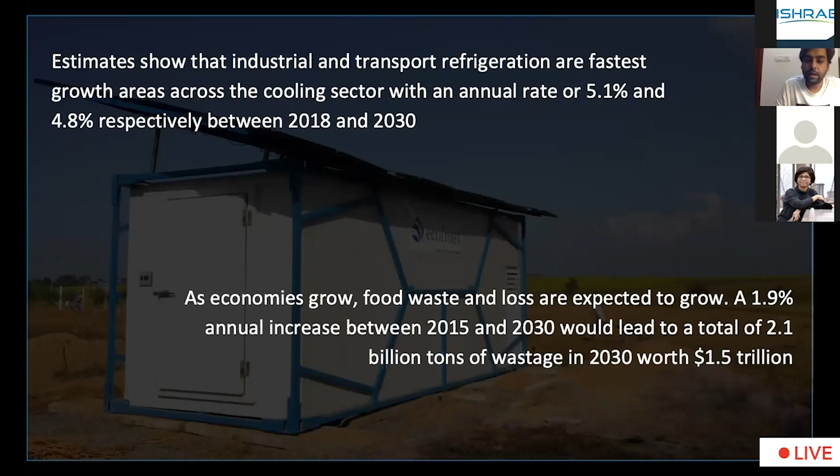If you can see some figures, food consumption has also increased, and as population increases, food consumption increases. Wastages happen because correct refrigeration systems are not present everywhere, resulting in billions of tons of wastage, expected to grow at a significant rate as you can see on the slide.

In general, we know that rampant usage of conventional energy sources leads to climate change, and that's a vicious cycle. As the climate changes, as the average temperature of the Earth increases, that leads to more consumption of refrigeration energy, meaning you spend more energy, throwing away and rejecting more heat which gets trapped.

You're actually using more fossil fuels and more refrigerant, which are not good for the environment and are being thrown into the environment, making it hotter. It keeps adding up, and as our requirements change with time, it becomes a bigger problem requiring a faster solution.

Space cooling will grow threefold between 2016 and 2050, which isn't very far away. If you look at the energy that an air conditioning ecosystem uses, it was 300 terawatt hours in 2000, which will become more than 10x by 2050 - an alarming situation that calls for changes in how we utilize energy to tackle this problem.

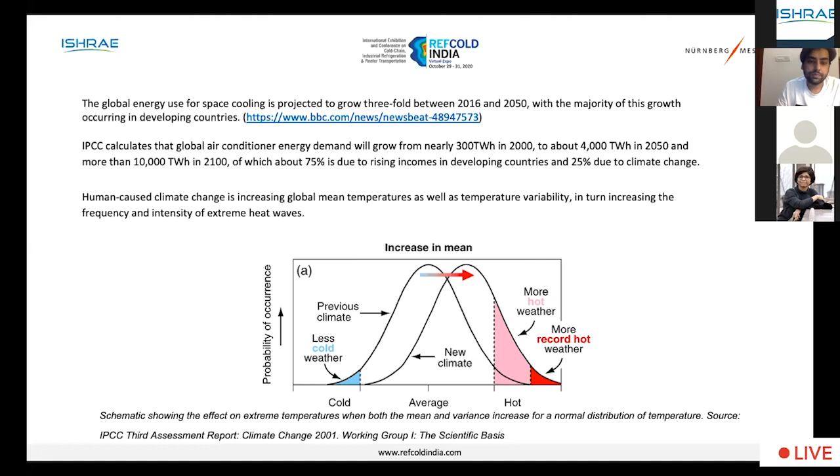With this, global emissions of carbon dioxide also increase. These cold storage technologies, used for storing fruits, vegetables, flowers, ice creams, meat, poultry and other commodities, require cold storages, pack houses, reefer vehicles, and ripening chambers. If you look at the Indian context, this is set to change very significantly in the next 7 to 8 years.

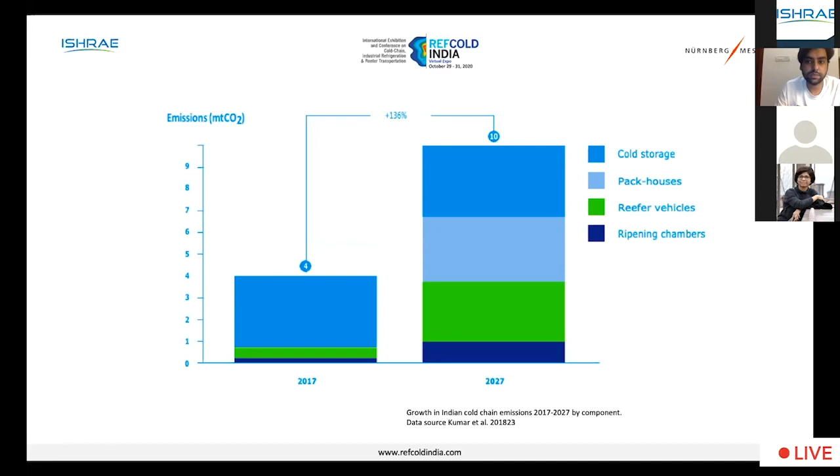You can see the graph - overall carbon dioxide emissions are set to grow by 2.5 times in the next 7 to 8 years, which is a problem to be solved. I think we are at a situation where we have ideas on how to solve them; it just requires better reach and better understanding of how these technologies work, and I think we can definitely get there.

Talking about renewable energy, most of us know there are several sources that nature provides which can be utilized directly to generate electricity. Some are already utilized, like hydraulic power plants being very popular as an energy source, which if utilized sustainably turns out to be a great resource. However, it possesses its own problems.

Solar as a power source has come up very fast in commercial settings, where you can see solar panels pretty much everywhere now. Every city you visit, you might see a solar power plant in the outskirts, sometimes at airports, or solar panels installed on building rooftops, and solar thermal systems used for water heating purposes.

Wind energy has also been commercialized with time, although with limited success compared to solar, but it's not too far away. Ocean is a great source of energy - we have tried to tap into tidal power and wave energy from the ocean to harness energy. Biomass is also a great source of energy, and again, it has to be utilized sustainably.

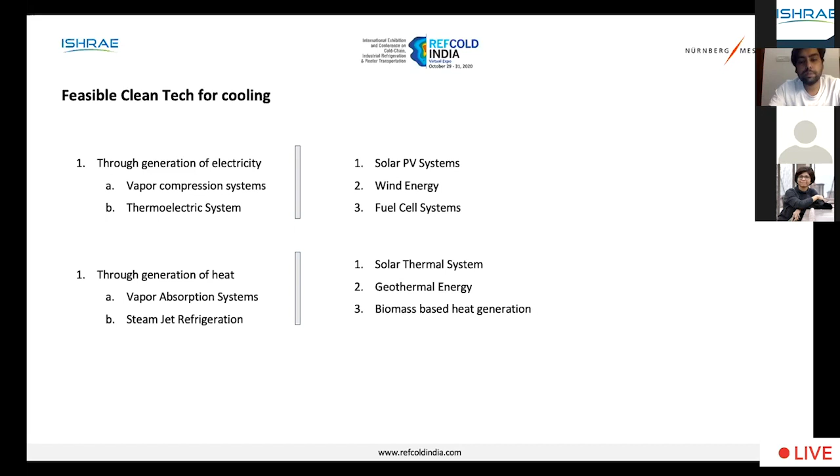Biomass-based heat generation is also a power source which is getting quite popular. We have seen some companies even in India which are making cold storages by utilizing biomass as a power source.

So if I have to talk about how to approach this entire design problem in terms of utilizing a renewable energy power source to produce cooling, availability is one of the main constraints of whether a renewable energy power source can be utilized at a particular place or not. Solar PV, for example, won't really work in areas where it's always cloudy, since we are not utilizing the heat of the sun, but the sunlight from the sun to produce electricity.

We need to ensure that we are at a place where there is ample sunlight, and India in general is a great place for producing solar. The Tropic of Cancer passes through us, and the majority of India is a good place to generate solar energy. However, there are cases in some parts of the Northeast and where hills are present in the north where solar is not utilized very well. But majority of places in India, including higher altitude places like Ladakh, get a great amount of sunlight to utilize as a power source to produce electricity.

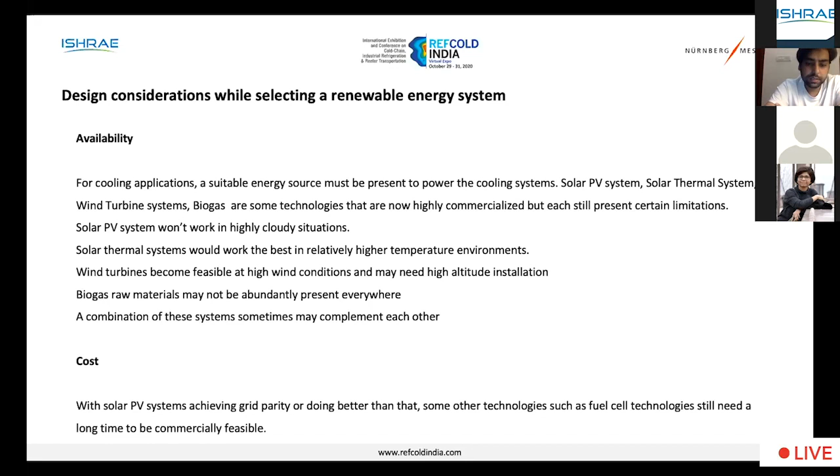But cost is one of the considerations we need to factor in when choosing a technology. Now, given that in general renewable energy power sources are complex and hence a little costlier than conventional power sources, energy efficiency becomes one of the biggest questions or problems to tackle while designing such systems. The reason for that is every unit of electricity extra that you utilize will cost you in the capital expenditure we are making in putting the renewable energy systems together.

For example, there are cases where a lot of cold rooms, which are small scale cold rooms, will be fitted with 60 mm of PUF, an insulation material, polyurethane foam.

If you are talking about renewable energy based systems, you'll try to optimize the amount of insulation that you use, which will in parts dictate the amount of solar panels that you utilize. There has to be a kind of trade-off between the two when selecting the number of solar panels and the amount of insulation that we use. The cost and feasibility trade-offs have to be evaluated during this period.

Refrigerants directly affect the efficiencies of the systems as well. If you look at some refrigerants, some of the ones which have been phased out actually have much greater efficiency compared to some of the more modern refrigerants that have come up. However, there are cases where, for example, R22 is highly efficient in a vapor compression system, but it's pretty much being phased out as we speak, in most of the world and slowly in India as well. The right refrigerant for the kind of temperatures you are working with is very important with respect to energy efficiency.

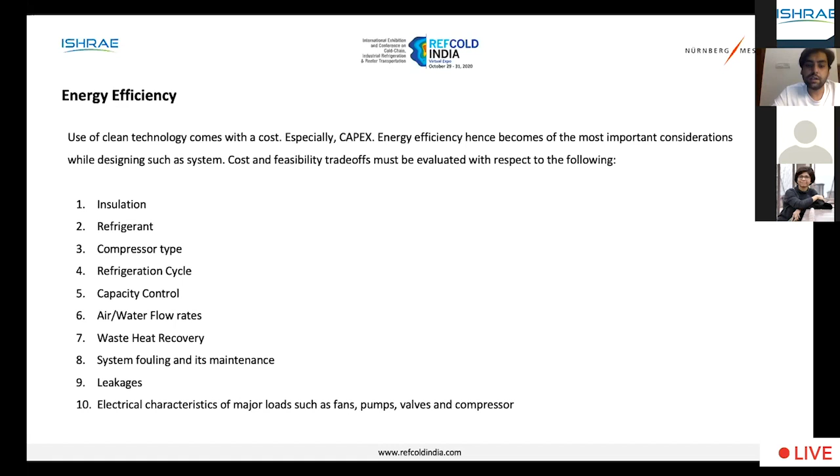Now, there are two major cases I'll talk about, one of them being a solar PV based system, where solar power is used as a kind of power generation system in a captive mode - meaning there is a cold storage establishment already available or being built or planned. It could be a 1,000 metric ton cold room or a 5,000 metric ton cold room, with a large surface area on the rooftop or nearby areas where solar panels can be put. And the way they work depends very much on local scenarios.

There is one case where solar PV - sunlight falls on the solar panels and generates electricity - that electricity can be fed directly to the grid of the entire cold storage system, and that energy is utilized right then and there.

If there is excess power available at any point of time which you are not able to utilize at some point of time in the day, that electricity can be exported back to the grid, and the government pays you back because you are now supplying electricity to the rest of the country. And in cases where there is a deficit in the amount of power that you are generating, you are pulling energy from the grid and you are paying for that.

Essentially what you end up doing is reducing the amount of electricity bills that you pay, and being able to generate the amount of electricity that you can with a given amount of solar panels, or the given amount of rooftop surface area, or the real estate area where you put solar panels. So that can be utilized.

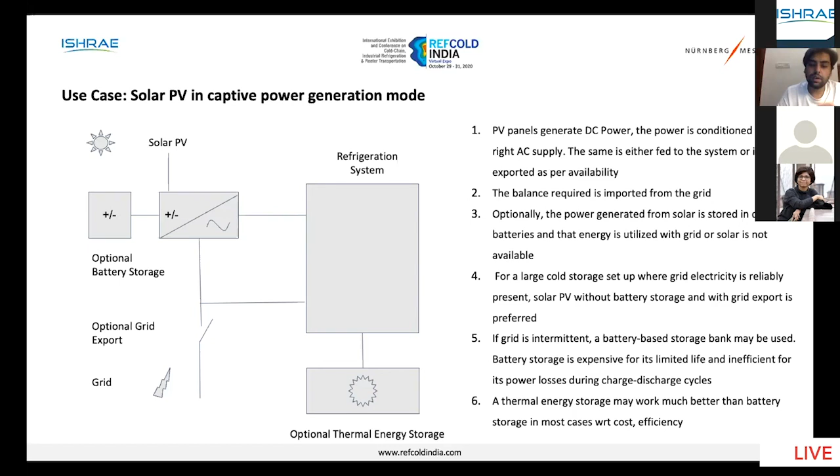That helps in two ways. One is, of course, you are able to use that as a buffer, as a replacement of battery. And second, there are cases where something called a differential tariff is applicable, where even though you have solar, you are still using electricity, but there are times of the day where the electricity costs are higher. At that point of time, you will run the refrigeration system with your thermal energy storage backup. In the rest of the times, you will utilize the grid electricity to charge the entire thermal energy storage. And solar PV can be used as an add-on to the system to make sure that you are reducing the amount of electricity that you are consuming even further.

There is another use case, and this is something that I have worked upon, and we have made products that are out there being used by people, where you have solar panels, you generate electricity, and convert it such that it can run a compression system, a vapor compression engine. At the same time, while you are pumping that energy into a compression system, there will be times of the day where there will be an excess generation of power. So the system will be designed such that it is able to give a bare minimum amount of cooling for the room cooling to happen.

But at the same time, given that this is a standalone system where there is no other power source present unless it's absolutely required, in those cases we would need to have a thermal storage or a backup system present over there. What I have done with our Ecozen products is basically a phase change material-based system.

However, there are a lot of cases where people put this excess energy inside batteries. Those batteries then convert the chemical energy stored in them to electricity, and that will keep the entire system cold 24/7, even when solar is not present. Given that solar is present only for 10 to 11 hours in a day, we need some kind of backup system, and there could be two different methods. One is a PCM based thermal storage, and second could be a battery based system.

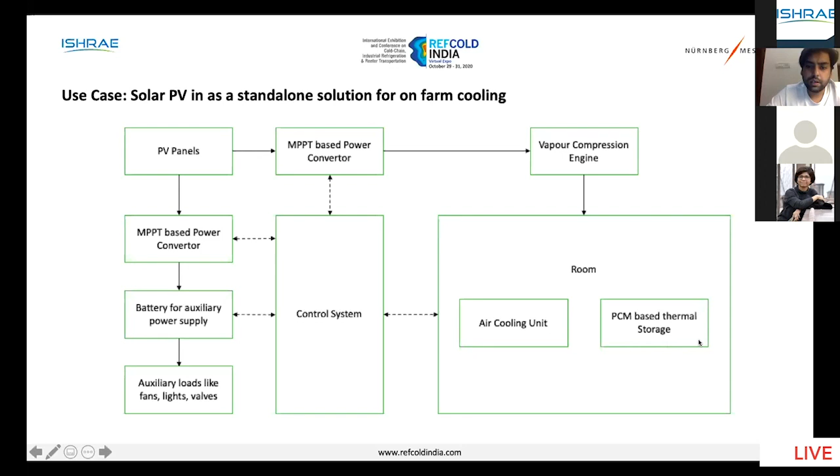And the reason why a PCM based thermal storage can be utilized over here is that it's ultimately cooling that you want to do. So why not cool earlier than you really need to cool the system, and utilize that cooling energy that you have stored at a later point of time to keep the entire system cold. But at the same time, since fans and control systems and auxiliary things like lights, etc., will require some kind of electricity, there is a small amount of backup battery energy that can also be stored over there.

So this is something that I was explaining: if we are sizing the system, we size it such that this is the amount of energy that we have, this is the heat load that we have, and this excess amount of energy goes into something called a thermal storage system, or something like a battery management system, where it is stored either in form of chemical energy or in form of thermal energy, and this energy should be sufficient to give you a stipulated amount of backup.

And typically, when we think about solar systems in general, we at least make sure that when the day ends, I should be able to keep the entire system cool until the next sunrise. However, we should also explore the possibility of the next entire day, and that is a worst case scenario, that the entire next day there will be zero production of solar. If that happens, size the amount of solar panels such that this can really be handled.

Sorry, my mouse is not really, just a moment. Okay. Okay, all right. So move to the next slide.

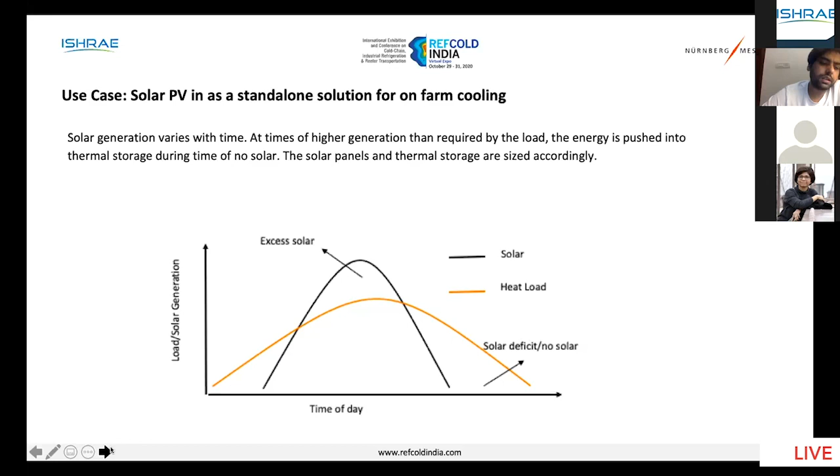But in case of solar PV systems, another thing that I wanted to touch upon was having solar panels at the correct angles. So if you talk to any professional who has been in the solar space, who installs solar panels for, say, pumping applications or rooftop solar generation systems for home applications, there are some general thumb rules that exist. Even in the power plants, there will be some thumb rules.

One is that there are technologies that can be utilized which track the sun at all points of time, right? Be it any season, any day, the control systems will try to make sure the solar panels always face the sun. The azimuth angle and the elevation angle are such that it always faces the sun, so that the normal irradiance coming to the solar panels is the maximum at all points of time. So basically, we're trying to utilize as much as possible, and that really gives much better harnessing of solar power.

If you look at general thumb rules, if a 1 kilowatt solar panel on a particular day generates, let's say, 5 units of electricity, a very well tracked solar panel can even generate 6 to 7 units of electricity. There are other situations where you do this tracking on a single axis, where the elevation can be adjusted in different seasons.

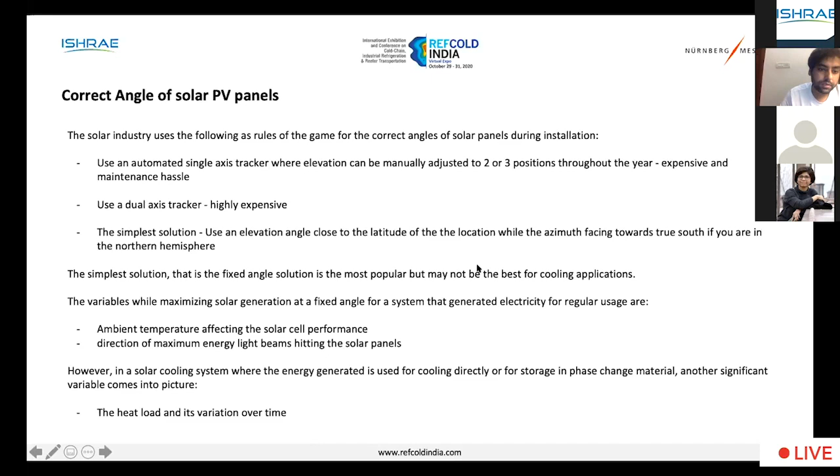And that is something that needs to be considered when we are designing solar panels, especially for these standalone cooling applications. I covered this part.

When it comes to renewable energy systems, especially solar, and many other renewable energy systems, we need to have a storage system in place. In fact, it is true even for hydroelectricity, where we need water to be stored using a dam, or even in a coal power plant, where you need a constant supply of coal. With solar, since it's only present for a limited period of time in the day, we need to have an energy storage mechanism.

In the first use case we talked about, where the solar power plant is utilized to reduce the amount of energy you draw directly from the grid and hence reduce electricity cost, an energy storage system may not be relevant. It can be directly feeding the grid, and you just utilize the delta amount of energy needed if solar production isn't sufficient to run the machinery at that point in time. However, in most standalone systems, we require energy storage systems.

If I talk from another experience, solar pumping, what happens is we don't store any energy in terms of chemical energy, batteries, or anything like that. The simplest way to store in that case is not really a battery kind of system, but storing in a water tank. In the day, size the system such that if you require, let's say, 1 lakh liters a day, and you are irrigating during the day and even during the night, you require some kind of energy storage. Just store it as potential energy in overhead tanks, and that is the most efficient system out there. Storage of water instead of storage of electricity or chemical energy, if you only have to utilize that energy for watering purposes.

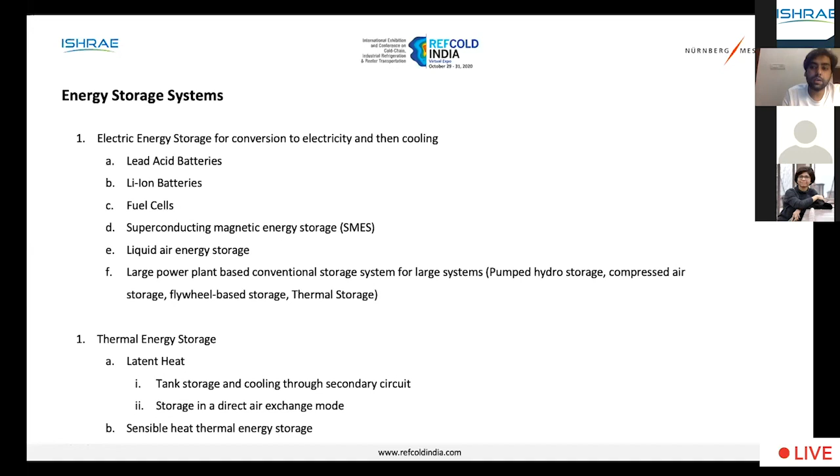So these are different kinds of energy storage systems used to provide cooling 24/7, especially in standalone renewable energy systems. I'm talking in context of solar power at this point.

While I talked about different properties of these energy storage systems, there are several considerations that need to be kept in mind while designing them. One of the prime things is cost, which has to meet the requirements. The life of these systems is again dependent on cost, because if the life is lower and you need to replace them frequently, that ultimately increases the life cycle cost of the entire thing.

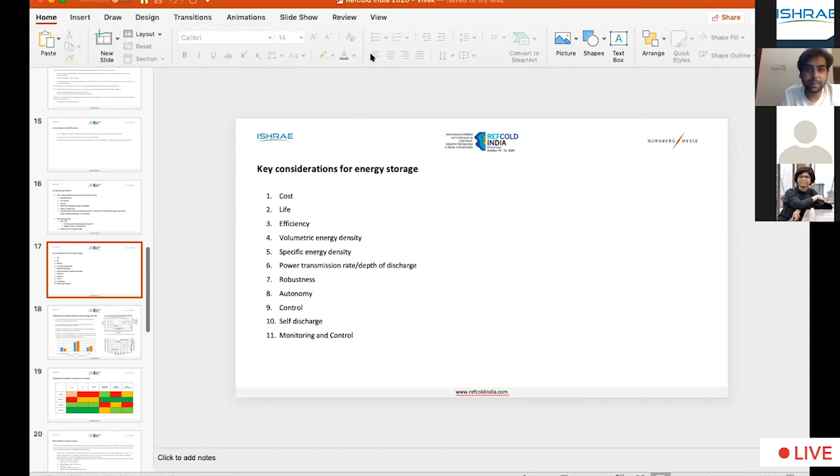So we have cost, life, and efficiency of these systems. Efficiency is basically the amount of energy you lose when charging and discharging these systems. The volumetric energy density, depending on the kind of space you have, determines which systems you choose. The specific energy relates to the amount of weight your system can carry. The power transmission rate refers to how quickly you want to discharge the system, or how deep you want to go in terms of discharging it.

Overall robustness of the technology you're using, autonomy, control, and self-discharge are important factors too, as in when you don't really require the energy, the source should be able to keep itself intact as much as possible. Every energy storage device will have some inherent self-discharge because of environmental factors or its own properties. Then there is the way you can monitor and control this entire system.

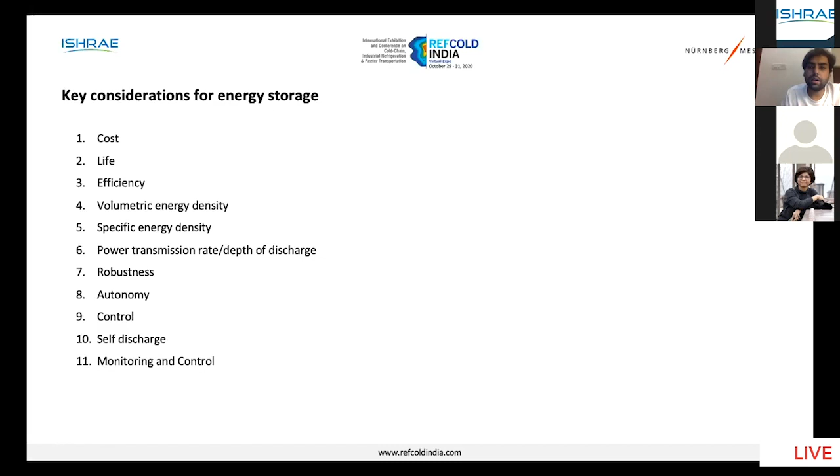I just wanted to talk a little about how chemical energy storage and TES compare with each other with respect to cooling technology. If you look at a battery system, it can be a lead acid battery. Some of the graphs here show lead acid or nickel cadmium type batteries, where there are optimal zones that exist in terms of state of charge, between 30% and 70% or 80%, where the amount of power that can be taken out is quite good.

The round trip efficiency, which is charging and discharging, is quite good, but that drastically changes as the state of charge changes over time. Also, with time, as more cycles of charging and discharging happen, batteries tend to have increased internal resistance, which leads to more losses in these systems. So batteries definitely have some issues with respect to efficiency.

If you look at a lead acid tubular gel battery, highly efficient and meant for operation for 5 years, typically they will have a round trip efficiency of about 75%, maybe even lesser, because there is an inherent loss in the battery charger, the power electronic system used to charge, and then there is loss while DC or AC electricity is converted into chemical form of storage, and during discharge the same thing happens. So these are some of the issues.

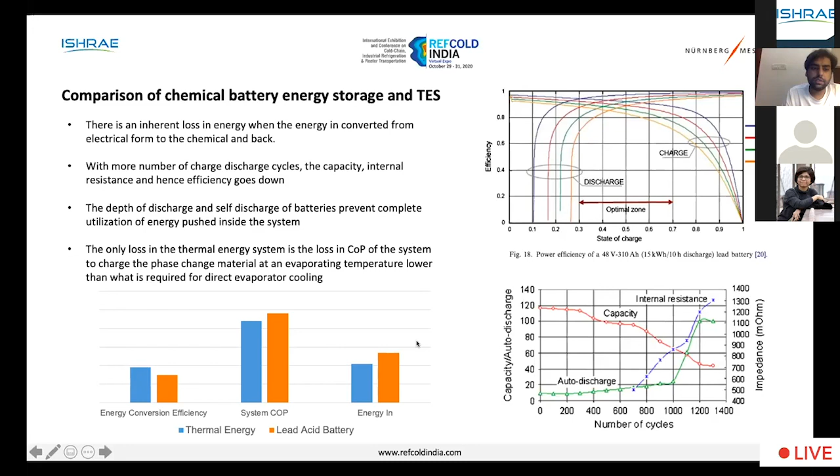So there is an inherent loss in the cooling cycle's efficiency. However, the overall energy consumption of a battery system will be much higher, because, like I said, 75% is the right round trip efficiency of a lead acid battery. And that too may be just a 6-month-old battery, not even after 3 years will it be more.

So these thermal storage systems definitely work better in these scenarios if they are designed properly. If you compare lithium ion with cooling technologies, a direct PCM based technology or a tank based PCM technology definitely works much better compared to battery technologies in almost every other aspect, except things like power transmission rate or energy density, because the energy density of, let's say, if you're using water, will be much lower than what goes inside a lithium ion battery.

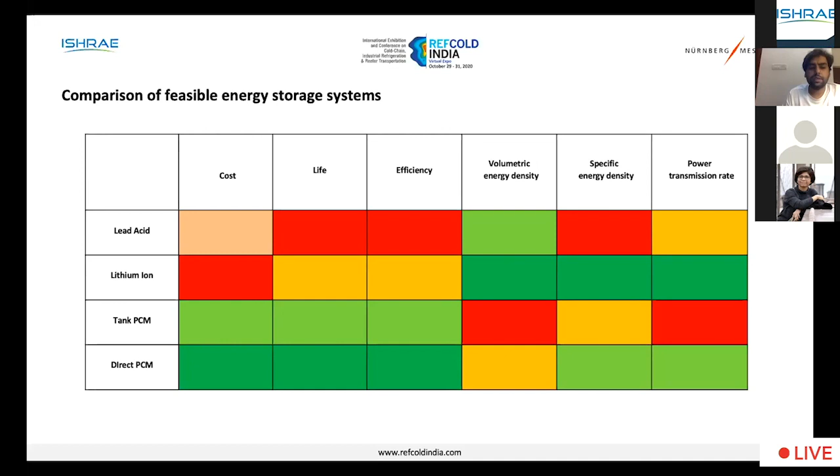But if you don't really have a lot of space or that weight restriction on the system, for example, a PCM system for a mobile refrigeration system would be a tough game to play, because if a 12-ton truck needs 1 ton of water or phase change material itself, that will drastically reduce the unit economics of the truck itself. So that needs to be thought about. However, it works much better in most cases for standalone applications if you talk about direct PCM systems.

Okay, we have crossed the time.

So there are cases I just wanted to touch upon a little bit of data analytics while doing all this. Data analytics comes into picture because when you're trying to use physics to estimate system properties, system design, or component selection, there are cases where we do very ideal calculations and end up either oversizing the system, sometimes even undersizing it.

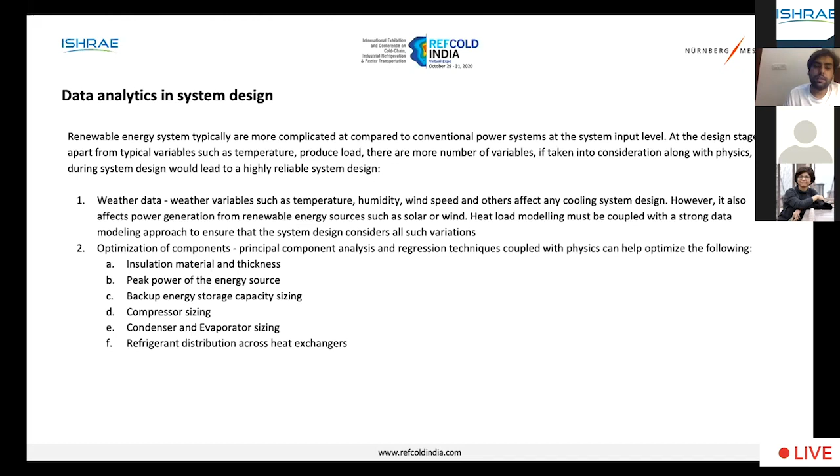And if we do proper heat load modeling coupled with a strong data analytics modeling approach, it becomes more and more robust. Since we do not really have the liberty to oversize, it makes a lot more sense to analyze things like weather data, ensure we are optimizing insulation, power, backup energy requirement, and the size of the compressor itself, and overall component sizing in general. It's extremely important for the energy to be utilized or generated properly.

It's extremely important to monitor how the systems are operating, and IoT plays a big role over there to ensure we are able to get the right information at the right time. The data that we can pull from these systems can tell us a lot about how the systems are performing over time, how they are deteriorating over time, and what can be done to predict issues, or even diagnose issues if they have occurred.

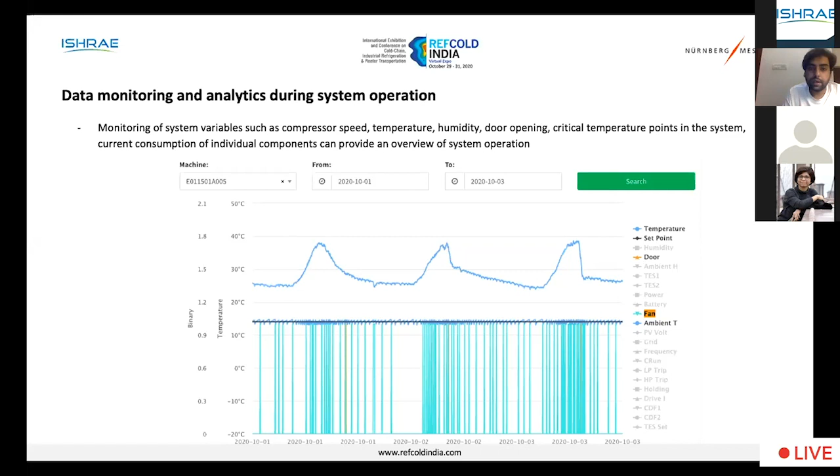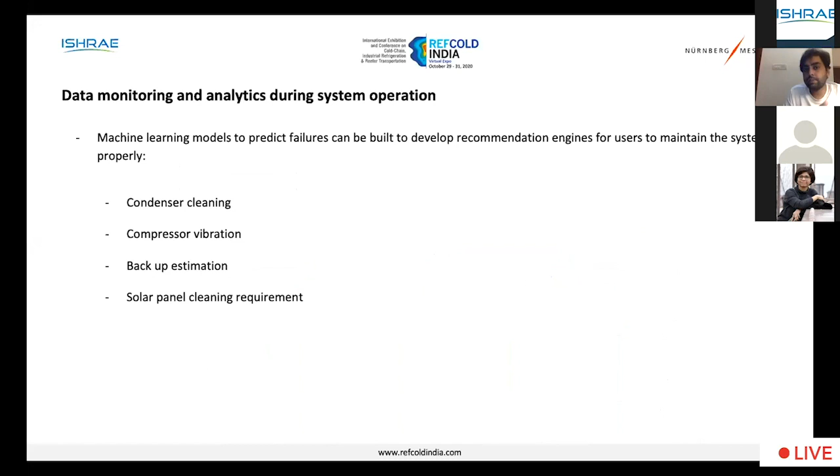Like I said, solar panel cleaning, compressor vibration, or condenser cleaning are important factors, and those can be done directly through data analytics. Some things like compressor vibration, or the right estimation of backup so that you are not ending up spoiling your produce, is something that becomes very important as well.

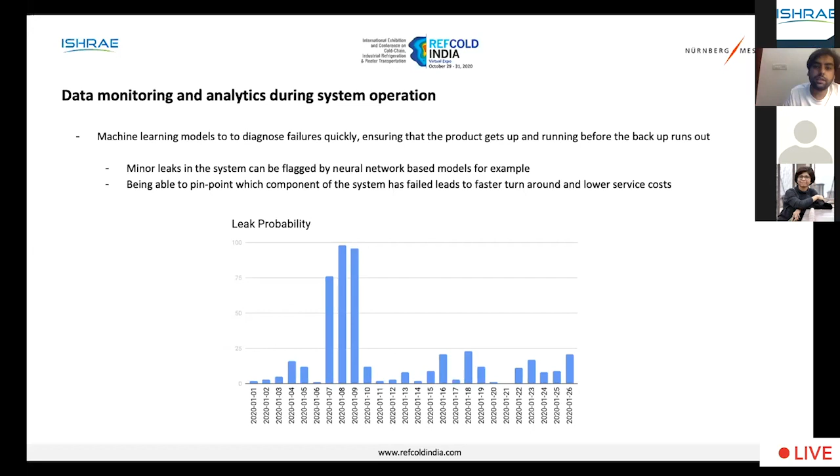There are other problem statements that can also be tackled using data analytics. Things like, if there is minor leakage in the system, how can data be leveraged to ensure we are able to diagnose it before even the backup runs out, and ensure that the overall cost of service is basically lower.

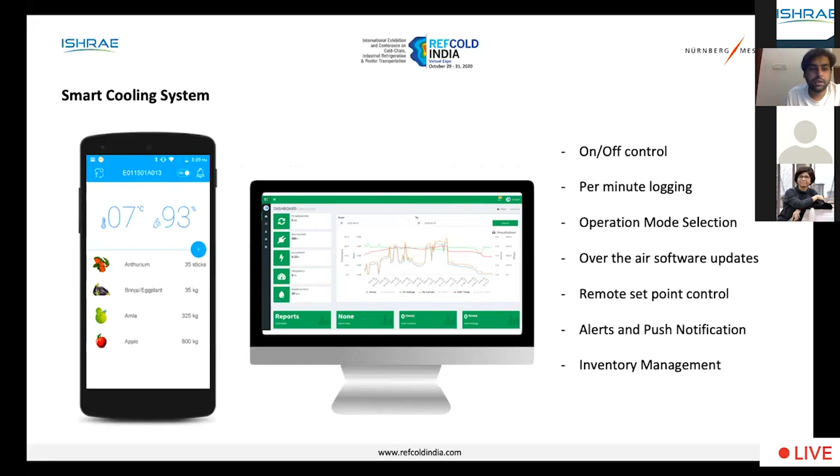Given that we are in an internet age, we should try to leverage things that help us much better, and making systems more and more smart makes a lot of sense. Some of the web and mobile technologies can be utilized for the same thing.

I think one of the prime questions that definitely comes to mind when you talk about a solar powered system is that the capex is very, very high. Like I started saying, the costs were very high earlier, and at this point of time, if you look at big solar power plants, megawatt solar power plants, the rate at which electricity from those power plants is sold is much lower than the rate of electricity you are charged at your homes. This means we are now doing better in terms of solar compared to coal or hydroelectric power, and the payback period of solar energy has become more and more lucrative.

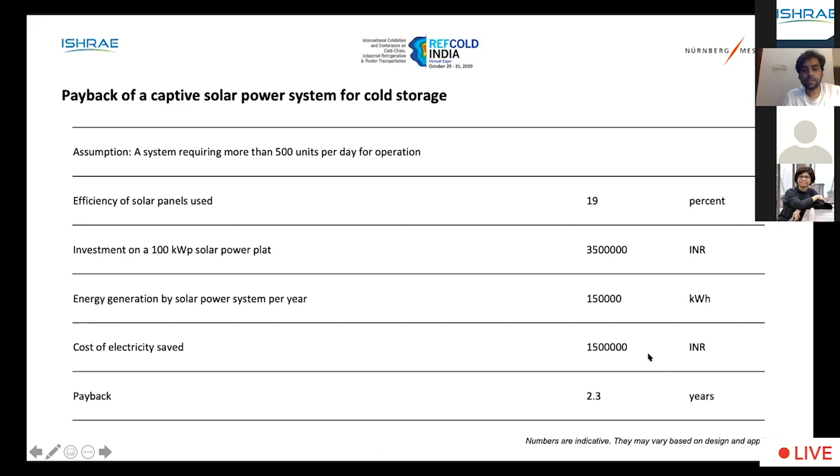In case of a captive power generation system, where you have a large energy requirement and you are putting solar panels to reduce the electricity bill, if you see these calculations, approximately the payback will be 2 to 3 years. In the small scale system that I talked about at length, an additional cost that you will probably incur for making this system, a conventional 5-ton cold storage, will cost about 4.5 lakhs.

A system with a solar power system along with thermal storage will probably cost somewhere around 8.2 lakh. These are some rough calculations with some assumptions. But if you see the delta amount, which is about 3.7 lakhs, it can be paid back very, very quickly, maybe in less than 4 years.

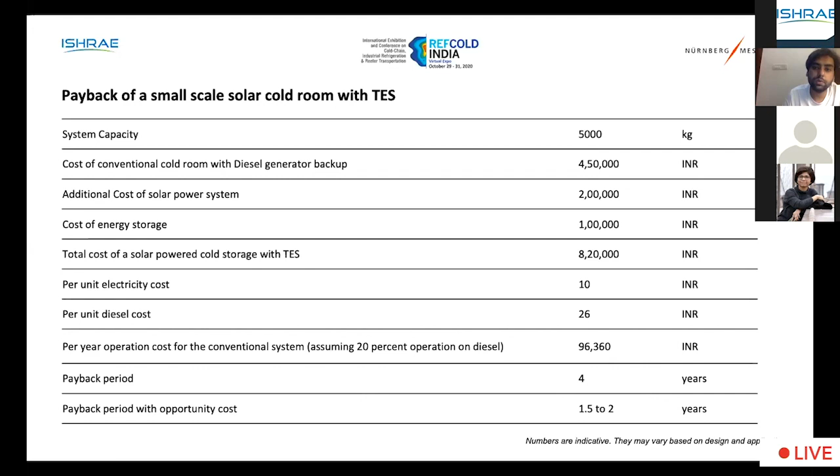And if you take the opportunity cost in mind, which is basically things like a cold room could not be deployed in an area where there was only 8 hours of electricity, which is generally the case everywhere in India, even though we call it highly electrified now. In rural areas, in agricultural places, wherever agriculture is really happening, we get maybe 8 hours of electricity at max in terms of 3-phase electricity. And over there, if you are able to put a cold room, the amount of value we are able to generate because of having a cold room in place is much more as compared to just saving electricity. So the payback period becomes more and more lucrative if we are empowered with solar as a power source on farm to cool produce right at the start, to pre-cool the produce right at the start of the cold chain itself.

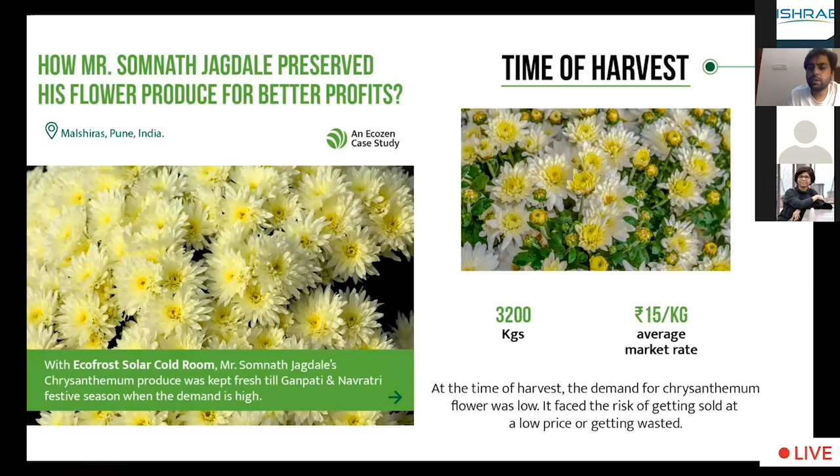This is an internal case study we have, where a flower farmer turned around better profits. I'm talking about the opportunity cost, where all of a sudden there was a lot of overproduction in the area. So the person stored the material in the cold room, cooled it, kept it fresh for some time, and the prices jumped by 5 or 6 times in a period of 10 to 12 days. Simply because the production kind of flattened out, the payback period for that person becomes much lower. So yeah, we do have great potential of utilizing solar as a power source for cooling applications, especially for storage of fruits, vegetables, and other commodities like meat, pharma, and fish.

I think it's long pending that we adopt these technologies faster for a better future for our planet. Thank you very much.

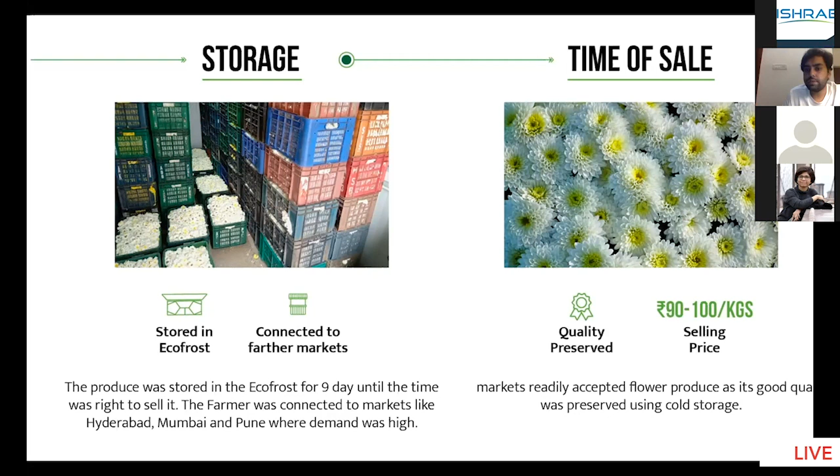We do have a lot of questions popping up from the audience, but I would take the two most significant ones at this point. So the first question is: how will a standalone solar system work on a farm level during rainy seasons?

Okay, so that's a question people generally ask if you're trying to pitch them a technology that says solar power can be used for cooling purposes at your farm. The problem can basically be solved in this way: during rainy season, your heat load is also lower, so you require a lesser amount of energy to cool, and you do have some solar power present. If the system is designed well, that partial generation of power can be stored and utilized. And second, in the majority of cases during rainy seasons, there isn't a lot of production. It's mostly the time you are sowing the produce or getting it ready, and right after that you start storing them. So it doesn't become a big problem for farmers when they try to utilize it. They look at the use case of maybe 10 months for this.

Thank you. And the next question is: what is the life of a thermal energy storage system?